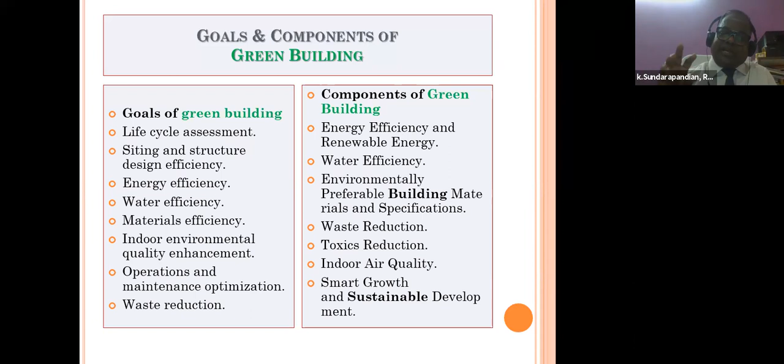Smart growth and sustainable development - these are all the green building components. Okay, what are the green buildings that are there in India?

There are beautiful buildings in India. To be very honest, I have seen the Sohrabji green building in Hyderabad, one of the amazing buildings. Whenever any chance comes, you should take the chance to see a green building and see exactly what the speciality is there.

The first name in the green building list is Suzlon One Earth, located in Pune, one of the wonderful buildings. This building received a LEED Platinum rating in 2010. The principal architect of Suzlon One Earth is Christopher Charles Benninger. He designed the building in such a way that 90% of it receives natural daylight - this is very amazing information.

And the CII, that is Confederation of Indian Industry, Sohrabji Godrej Green Business Centre in Hyderabad, and ITC Maurya, New Delhi, and Jawaharlal Nehru Bhavan, New Delhi - these have all been developed in India.

Now they are expecting that in India, more than 2 lakh green buildings are going to be there by 2025. This is the expectation.

And ITC Green Center, Gurgaon - of course, Gurgaon and Noida, that IT area itself will be a very big thing actually.

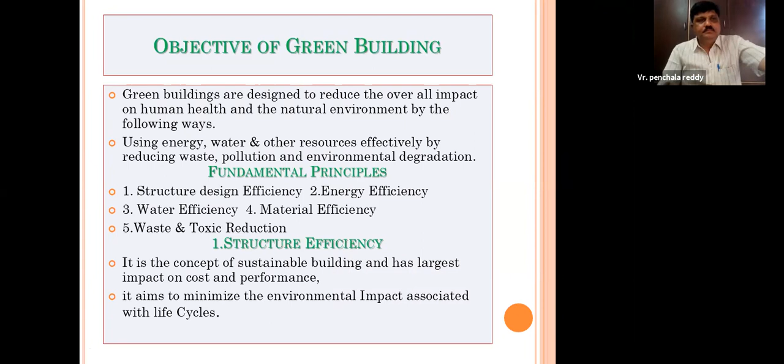The green buildings are designed to reduce the overall impact on human health and the natural environment by using energy, water and other resources effectively, and by reducing waste, pollution and environmental degradation.

These are the fundamental principles of green building: structure design efficiency, energy efficiency, water efficiency, material efficiency, waste reduction and toxic reduction. These are all the most important fundamental principles in green building.

Whenever you go to any architect designing a green building, if you ask, they will put up all these things. They won't just say daylight is required, that's enough - no, it's not like that. They will go in-depth, designing each and everything, considering what the effect will be on that. Any architect designing a green building will consider each and everything. Let us see that one by one.

Structure efficiency is a concept of sustainable building and has the largest impact on cost and performance. Many people say green building will be very costly - yes, let it be, but the energy saved is going to be a very huge thing, and it will save you cost. Maybe initially it will be 10% or 20%, but on a longer run we'll be able to save the money, and whatever cost you save, you can collect over time.

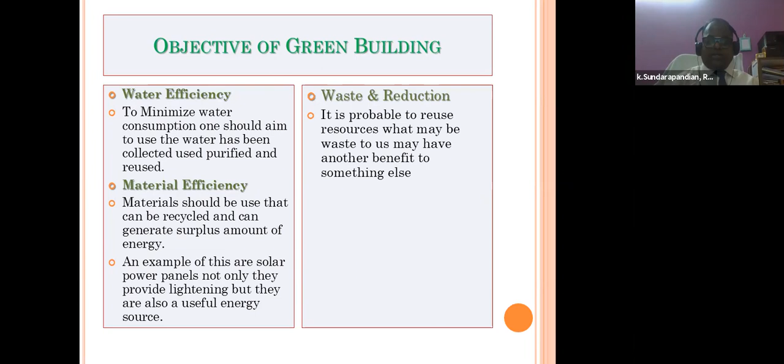Okay, what are the sustainable green building materials that can be used in construction? What are the materials? Bamboo.

When bamboo was told, I don't know how many of you know, one of the companies I have seen in Bangalore erects bamboo buildings for the army in Assam and other forest areas. They were taking orders, erecting only bamboo houses, bamboo camp houses. You will not believe it, it is amazing, one of the wonderful bamboo houses. When you go inside, you will not feel like you are inside a bamboo house at all.

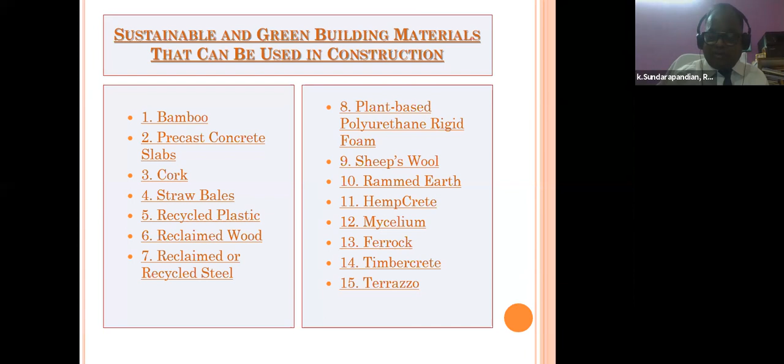Very wonderfully finished, very nicely decorated inside, such a wonderful thing. So bamboo and precast concrete slab, hollow core slab, precast slab - all these things can be used. And cork, straw bales, and recycled plastics - I will show you some photographs. And reclaimed wood, we can use that too. And reclaimed or recycled steel can be used. And plant-based polyurethane rigid foam concrete, all these things. Sheep's wool, rammed earth, and hempcrete - hempcrete is one of the lightweight materials, but beautifully they are making blocks and houses also. And mycelium, Ferrock, timbercrete, and terrazzo. So these are all the materials which can be used as green building material.

Okay, we have seen what is green building. We have seen the concept, we have seen what is required. Now let's see the merits and demerits in green building. The merits are very high, merits are more. Let's see those merits.

It's an efficient technology, true, because the energy which you are taking inside the building is amazing. So easier maintenance - it is an easier maintenance, so it will be very good technology. Return on investment - whatever you invest, you will get a return. I have seen that wherever green building certification is there, people occupy very quickly. Many companies in Chennai, I have seen most of the green buildings are occupied by big companies. So what happened? Return on investment for the builder.

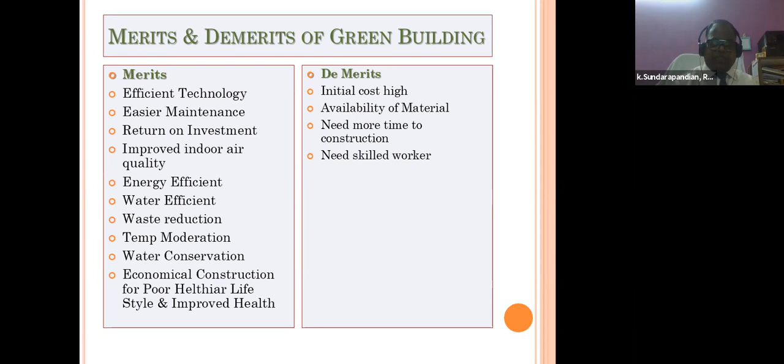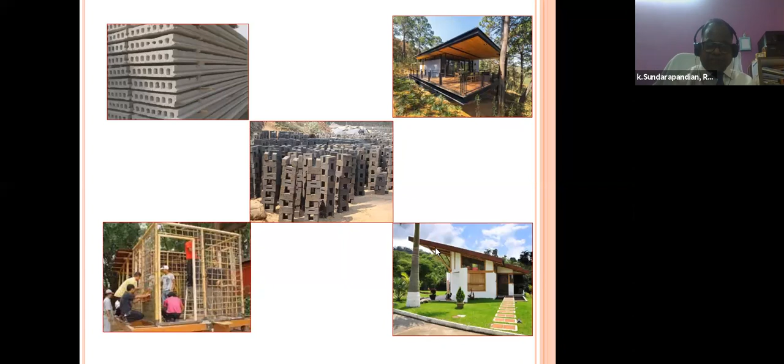So we have seen almost everything, but let's see what is the concept and policy in India.

The LEED certification is the first one which came in the world. The Leadership in Energy and Environmental Design is the most widely used green building rating system in the world, available for virtually all building types. LEED provides a framework for healthy, highly efficient, and cost-saving green buildings.

The green building policy and codes in India include the National Building Code, BIS, ECBC which is the Energy Conservation Building Code, and BEE, the Bureau of Energy Efficiency. EIA is the Environmental Impact Assessment - for any big project, the EIA has to be obtained, along with water and air consent, and clearance from the Ministry of Environment and Forest. These are all the policy creators and the ruling bodies.

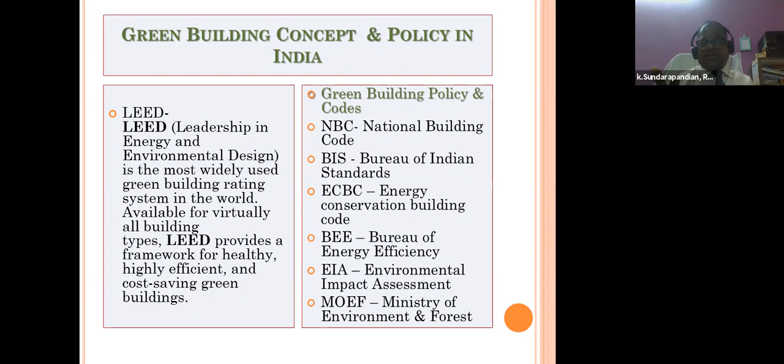Now there are 3 primary rating systems in India. I'm giving you all these things because we need to know, before going for green building, what certifications are there, who gives the certification, what kind of certification they give, and what ratings are there. These are all things we should know.

GRIHA is an acronym for Green Rating for Integrated Habitat Assessment. GRIHA is a Sanskrit word meaning abode, that is human habitat, that is building. It will interact with the environment in various ways. This is exactly what GRIHA means.

TERI is the Energy and Resources Institute. TERI and the US Green Building Council have jointly announced a strategic collaboration to advance high performance buildings in India and Southeast Asia. So they are jointly working on the green building concept.

Then coming to ADaRSH - the Association for Development and Research of Sustainable Habitats. It works along with GRIHA. ADaRSH is a platform to facilitate pan-India ongoing interaction and networking between building professionals, developers, and government officials, in association with TERI and MNRE. MNRE is the Ministry of New and Renewable Energy, which works along with others to do that.

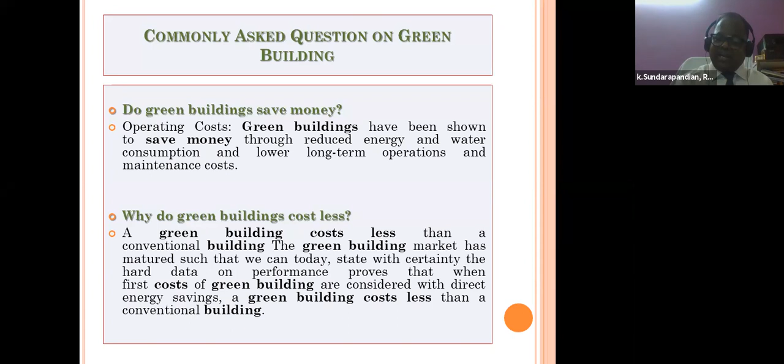But the cost saved by the green building is amazing and excellent. We are getting a lot of advantage through energy savings. This is exactly what it says about green building cost, whether it is less or more.

We have given you feedback on what is green, what is required, and what is important to know about each and everything, because before going for a valuation, we as valuers need to know all these inputs. That is why we covered that. Now let us go into our subject: valuation, with some inputs.

I am just trying to study this from a valuation perspective on green building.

Sustainability encompasses a wide range of physical, social, environmental, and economic factors that can impact value, of which a valuer should be aware. We should know the impact on physical, social, environmental, and economic factors. Nowadays many bank formats include headings like physical, social, environmental, economic, marketability, and legal, on which you have to respond to each and everything.

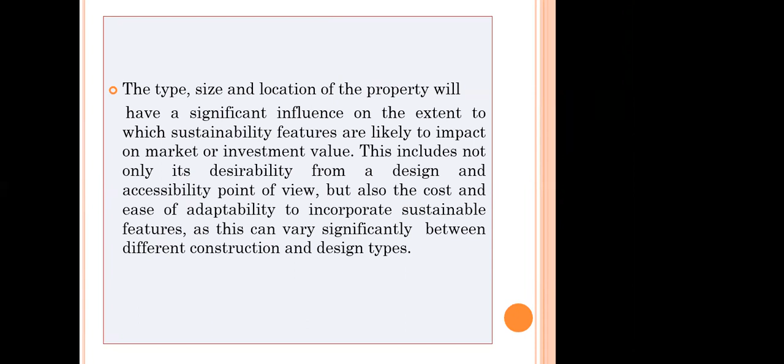Why? Because whenever you see value, sometimes the cost consultants will be involved right from the designing of the green building. They'll be associating with the client as well as the architect right from the beginning. Many cost consultants are there, and they will be involved with that.

Generally, the cost consultants, whenever it goes to the bank, will depend on registered value or 35 AB value. They'll take a signature, or they will ask them to do the evaluation. This is where our role is involved. We'll have to see whether it is a conventional building or a green building, how the building has to be differentiated -- specification, material used, whether it is energy saving or whether it is costlier.

In this building, when I went for a valuation, the insulation is not at all required for our Indian climate. If you are doing that, you should have some protective method in place, some kind of maintenance. In fact, in one of the buildings we have seen, beautifully, the rooftop was covered with solar panels. Beautiful.

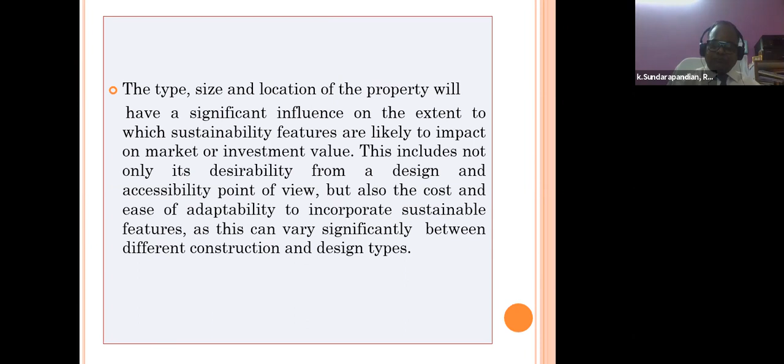What is the role in doing green building valuation? When collecting data on a property for valuation, valuers are advised to expand their basic data collection. More importantly, they have to collect data to include a record of any sustainability factor - what are the sustainable factors, what other things are relevant to the requirement for the green building. Even if they don't currently impact value, you collect it because it's important, expanding the data available within the market.

Valuers are contributing to the improvement of knowledge within the profession by establishing information based on sustainability of market comparables. Whenever you are doing valuation for an IT park, you need to see that comparability, which is more important.

Comparable sale - if there is no sale available, how do you do it? That is where our important skills come in. We'll have to give weightages, we'll have to compare, we'll have to see the location, we'll have to see the other important factors that have to be considered, and give proper weightages, considering each and everything. That is what is more important.

An essential exercise when valuing older properties, for example valuing existing stock, is recognizing that such properties, due to the period at which they were built, may not meet current environmental standards. That is what I was telling you - a recently constructed building is done according to present environmental standards, whereas an old building doesn't have environmental standards at all.

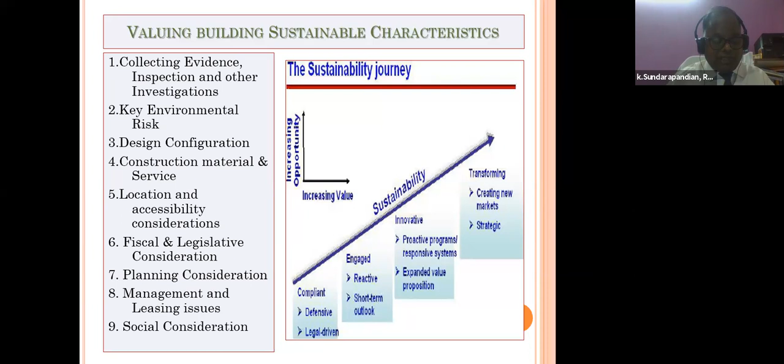And management and leasing - when seeking to improve the building's inherent sustainability characteristics, owners or occupiers normally have little option other than to refurbish. But the greenest building, if inappropriately managed, will not perform to its specification. It will not perform, it will have a different meaning. So these are all the things one has to see.

And leasing issues - whether they have any leasing issues, what is the agreement they have - these are all the things one has to see.

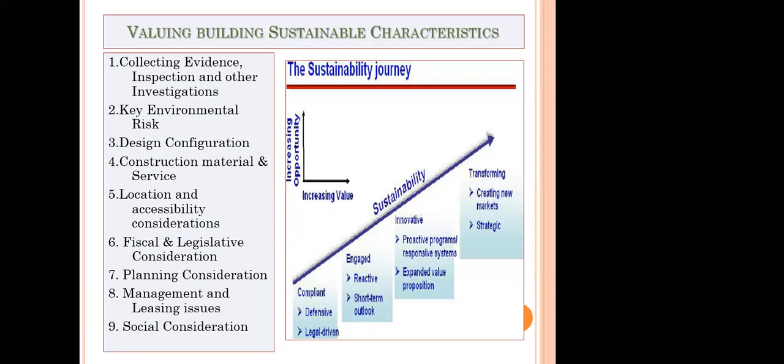Now, considering the sustainability characteristic in market, how do we do market value, market rent, and investment value? What details are required? We need analysis of comparable evidence in light of sustainability issues. Since we are doing green building valuation, we need comparable evidence specifically for green buildings.

An equal comparison of each and every element, green building to green building, is required. We need to look at occupiers and tenants, statutory certification - what kind of schemes they have on green building, whether energy efficiency is there, and what the flood risk is in that particular area.

I have seen one building which is very near a big lake. When we visited for an insurance claim, my senior was told, 'Sir, the lake never floods. We are very happy, sir. It never has flooded. Always water will be there. We are getting water from our borewell all the time, very fantastic water.'

There is no issue, they said. But in one cyclone, the entire Chennai was flooding, and that building also flooded. Because of the lake, it broke and started flooding inside. The entire basement, two basements, everything was full of water - water, cars,

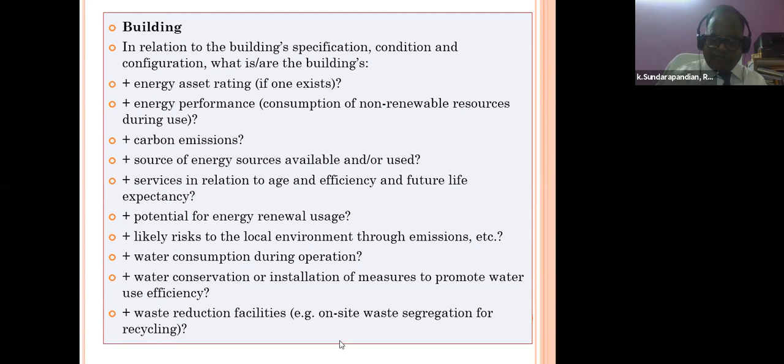Many IT parks actually have a recycling system with capacity adaptable and flexible to enable it to be used differently in the event of changing demand patterns, and likely resilience to the consequences of climate change—that is, storm damage, maintaining usability under temperature changes, changes of end users, and barriers to free accessibility inside the building for disabled users.

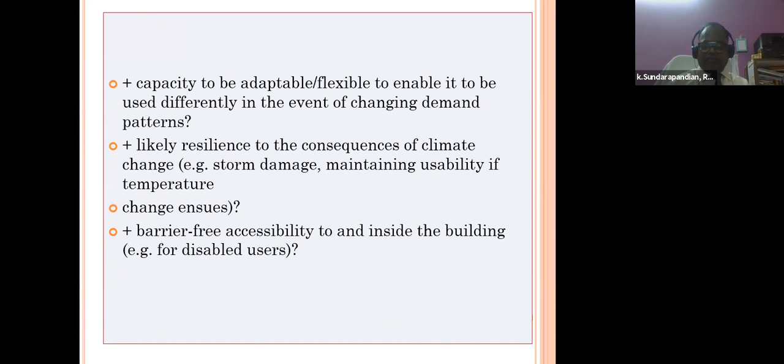These are all the things we need to collect, and safety under extreme conditions such as fire and tempest.

And design and construction in relation to its ability to facilitate future reuse or recycling of materials in the event of refurbishment and demolition; health impacts in relation to building materials and building specification—that is, daylight and natural ventilation, etc.—and ability to support user comfort, that is thermal conditions, visual conditions, acoustic conditions, and indoor air quality. Overall, the likelihood of maintaining a long future life based on a developing sustainability agenda, including periods between refurbishments.

I told you one of the companies was refurbishing every 3 years. Why are they doing that? What is it for? You can study and collect this information, which is more important—one can learn from it.

And finally, availability of solutions to resist environmental risk and flood prevention schemes for buildings at risk. We should prepare for any untoward incident.

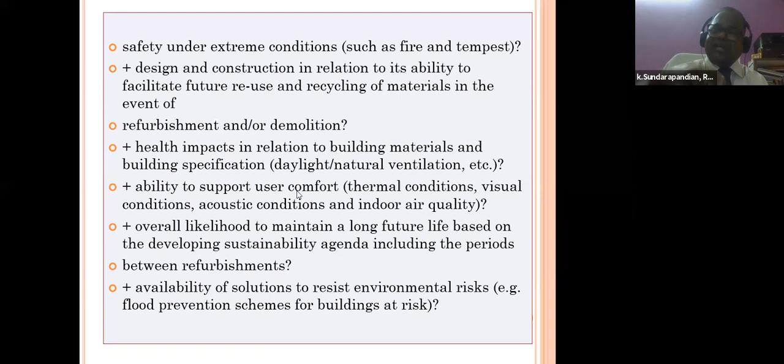What documentation is required for green building valuations? Documentation available in relation to statutory requirement certification, rating as required in the EU under the Energy Performance in Buildings Directive, and voluntary certifications—including date granted and grade achieved in LEED, BREEAM, or IGBC—any other externally verifiable evidence of sustainability, winner of any sustainability-oriented design awards, building passports or building files in the sense of objective building documentation along the building life cycle, ground expert testimonies, building diagnostics, and blower door tests.

This is also more important—whether they are doing that testing, whether it is operating, whether it is checked by everybody. In green building, many IT parks with a green building test every day, to check whether it is performing well or not. They have preventive maintenance, so everything stays in order.

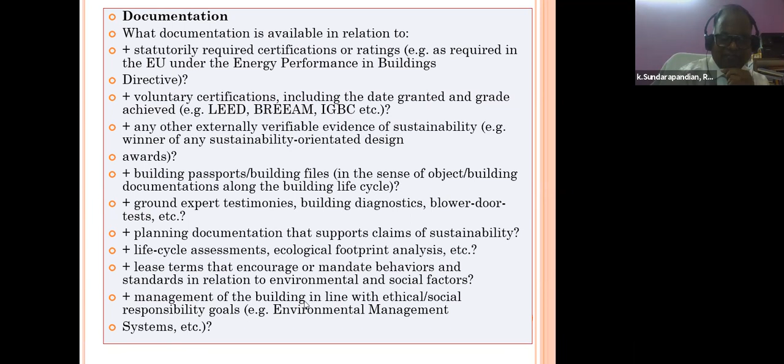The planning documentation that supports claims of sustainability—life cycle assessments, ecological footprint analysis, lease terms that encourage or mandate behaviors and standards in relation to environmental and social factors—management of the building in line with ethical and social responsibility goals, that is, environmental management systems, and the relation of data to value: what are they?

In reviewing or using the data gathered, the valuer should consider to what extent the sustainability characteristics of the subject property meet the best practice of comparable buildings, which is more important. When comparing buildings, we need to know does the building present environmental risk that can be quantified and linked to insurance and ability to form appropriate security for a loan?

Does the building fail to meet best practice in relation to health, well-being, and occupier comfort standards? Where the building is below best practice standard, would it be economic to remedy the deficiencies given the context in which the building sits, taking due account of any local or national incentives or discounting schemes that could reduce the cost of retrofitting? For green buildings, government is giving consideration and discounting some things.

And for insurance, they are giving lower premiums for green buildings as an encouragement. Does the building present operating cost advantages or other aspects that might make it more attractive to tenants or occupants than comparable properties?

What impact does the presence or absence of sustainability characteristics have on the timing and level of resale or re-letting values and the ease of marketing? More important inputs and data are required.